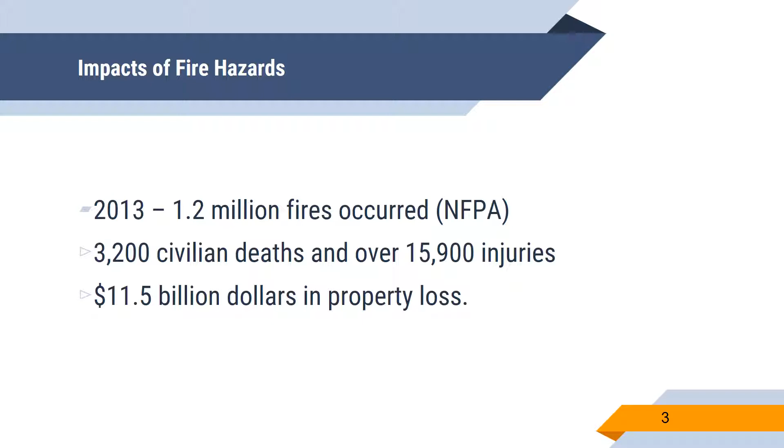Building codes throughout the country regulate the fire resistance of the various elements and assemblies comprising a building structure. These elements include structural frames, which include columns and beams. They also include floor and roof systems and load-bearing walls. Now, all of these elements must be able to withstand the stresses and strains that are imposed by a fully developed fire. At the same time, of course, they must sustain their own dead loads and superimposed loads without collapsing.

Fire resistance ratings required of various elements by the building codes are basically a measure of the endurance needed to safeguard the structural stability of the building during the course of a fire, and also to prevent the spread of the fire to other parts of the building.

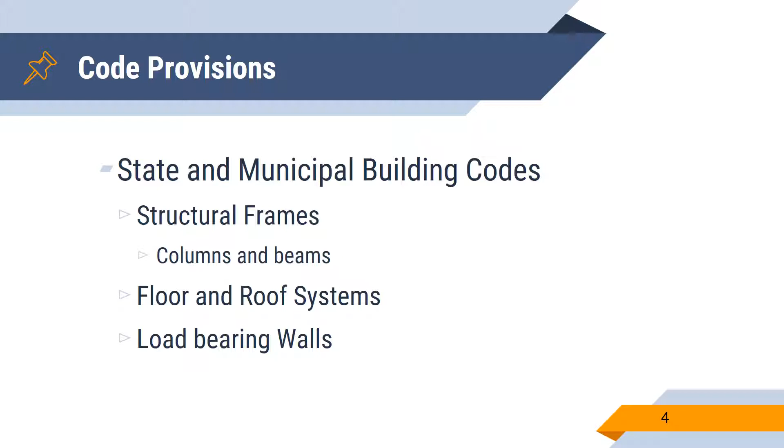Now, in the design of structures, building code provisions for fire resistance are sometimes overlooked, and this may lead to costly mistakes. It's not uncommon, for instance, to find that a concrete slab in a waffle slab floor system may only require a 3 to 4.5 inch thickness to satisfy an ACI 318 strength requirement. However, if the building code specifies a 2-hour fire resistance rating for that particular floor system, the slab thickness may need to be increased to 3.5 to 5 inches.

And this all depends on the type of aggregate used in the concrete. Now, under such circumstances, from an economical standpoint, the fire resistive requirements may indicate another system of construction to be more appropriate. For example, a pan joist or a flat slab plate floor system.

Basically, what it is, certain structural members possessing the fire resistance prescribed in building codes may differ significantly in their dimensional requirements from those predicated in the ACI 318.

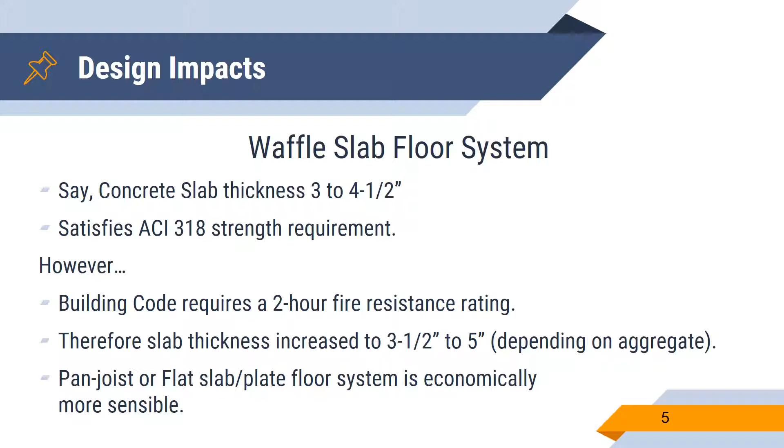Now, most of the state and municipal building codes are modeled primarily after two model building codes, one of which is the International Building Code. The version I'll be referring to will be the 2015, and then the NFPA 5000 Building Construction and Safety Code, which is the 2015 version. For simplicity reasons, I'm going to try to just reference the International Building Code, and you guys can take a look on your own at the NFPA version.

Now let's go over some common terms you're going to hear throughout this presentation.

First one, fire resistance rating. The IBC defines this as a period of time, usually expressed in hours, during which a building element, component, or assembly maintains the ability to confine a fire and also continues to perform a given structural function.

A non-combustible material is a material that, under the conditions anticipated, would not ignite or burn when subjected to fire or heat. Restrained is basically any condition in which the expansion at the supports of a load-carrying member, resulting from the effects of a fire, is restrained by forces external to the member.

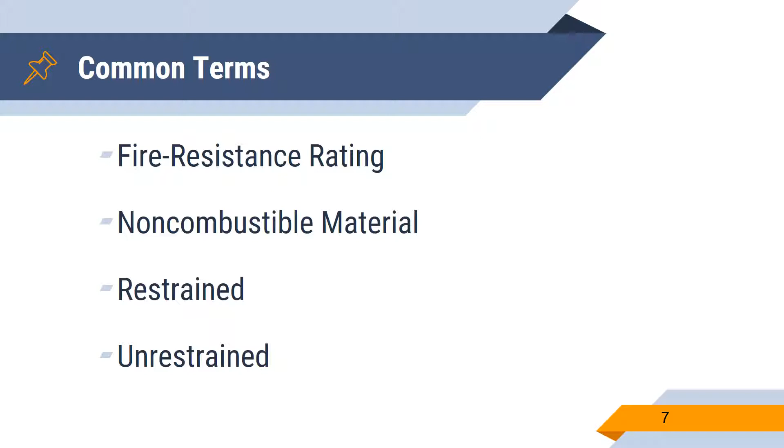Unrestrained is a condition in which the load-carrying member is free to expand and rotate at the supports resulting from the effects of a fire.

In this section, we're going to go over the testing method used to establish a fire resistance rating of an assembly.

Now, the test used to determine the fire rating of certain assemblies is the ASTM E119, which is the standard test method for fire tests of building construction and materials.

In this test, assemblies are subjected to a fire that follows a standard time temperature curve. The fire resistance rating of an assembly is determined by the duration of the test until one of the following set endpoints is reached.

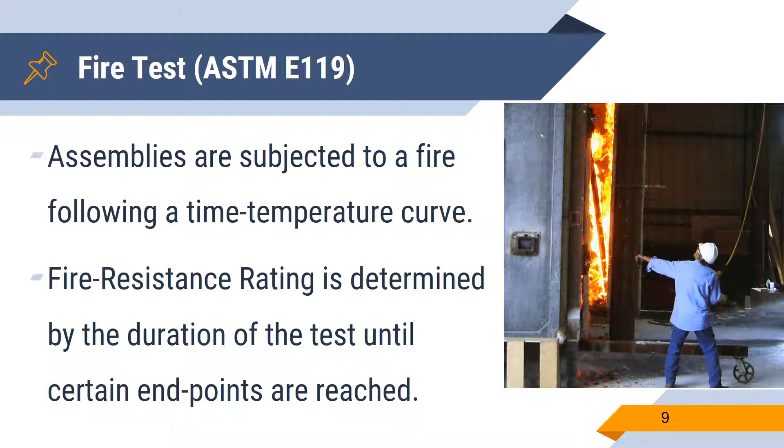For the fire test, there are three endpoints that are looked out for when performing the test.

One of them is flame passage. Basically, they have cotton waste on the opposite side of the assembly from the fire, and as a result of flames or hot gases passing through, the cotton waste ignites, and that triggers the endpoint.

Another endpoint is heat transmission. The temperature of the unexposed surface of the assembly rises to an average of 250 degrees Fahrenheit, or a maximum of 325 degrees Fahrenheit at any one point. So the total average of the whole area is 250 degrees, and then at any point the highest can be 325 degrees.

Another endpoint is structural failure. The test specimen is unable to sustain the applied loading and collapses, which is an obvious endpoint. There are other additional fire resistance rating criteria which you can look up in the ASTM manual.

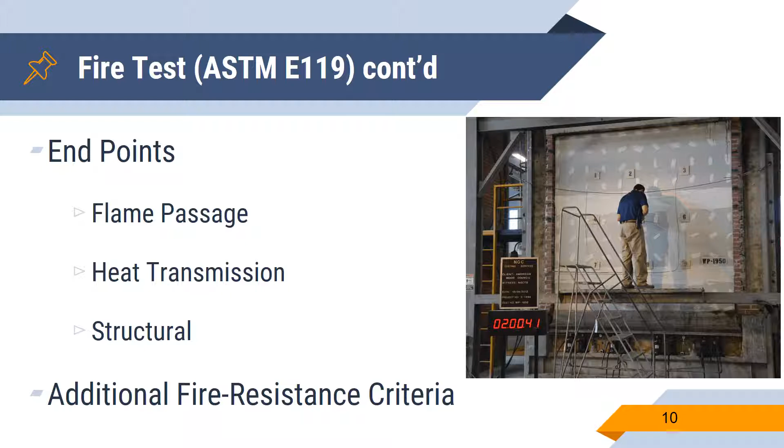Now, the results of many of these ASTM E119 standard fire tests on reinforced concrete members have been compiled and analyzed over many years. Along with the standard fire tests, there has been research and development of data on the strength of reinforcing steel and concrete at elevated temperatures, the temperature distribution within concrete, the verification and modification of theory, and the effects of restraining thermal expansion during heating.

This extensive testing and research forms the basis for analytical methods of determining the fire ratings for reinforced concrete structural members. Determining fire ratings can be classified into two methods: rational design and empirical design. This is what we're going to get into in this next section.

Now, determining fire ratings can be classified into rational design and empirical design. Rational design is accepted in Europe, Australia, New Zealand, and in the United States it's accepted as an alternate. Rational design is a much more detailed design of the fire rating of a system.

The other one is empirical design, that works off of research and development from ASTM testing, and it just establishes minimum critical thicknesses of members, minimum cover for concrete members, and such.

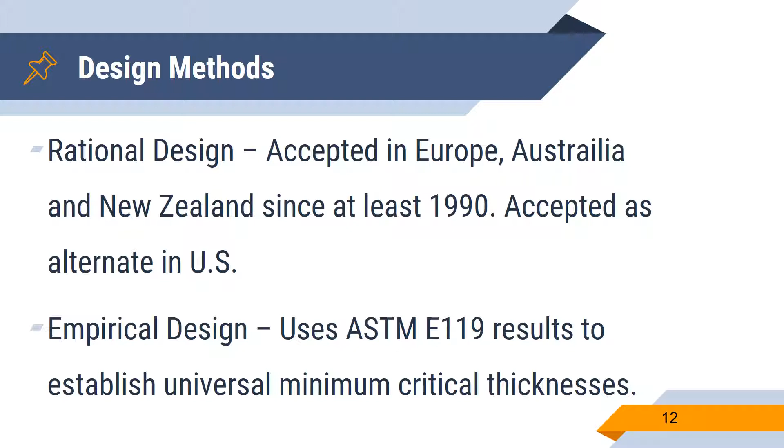In rational design, the fire rating is the time required for the load capacity of a member to be reduced to equal that of the service loads.

The rational design process for fire exposure has been included as an acceptable alternative to prescriptive methods in applicable codes in Europe and Australia, as mentioned previously. In the US, building codes have been slow to adopt similar provisions. However, designers are permitted to present the results of a rational analysis for fire resistance rating as an alternate method of compliance.

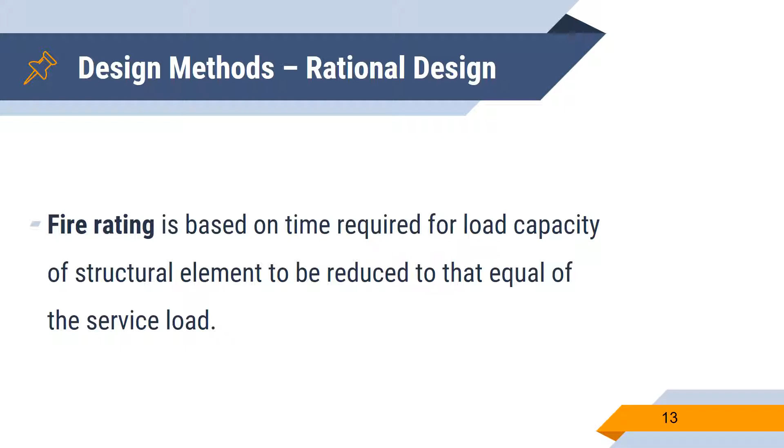The rational design method is a three-step design, the first of which is defining the exposure of the fire incident on the assembly. This can be from the ASTM E119 standard time and temperature curve, or another source, as long as it's agreed upon with the building official wherever it's codified.

The second step is the heat transfer, calculating the heat transfer on the assembly. This may be determined using simplified methods such as tables or lumped thermal capacity models, or more advanced methods employing finite element programs in both 2- or 3-dimensional forms to establish the temperature profile within the assembly.

The third step is the structural analysis, which uses established degraded material properties at elevated temperature. Basically, the structural analysis treats the fire as an imposed load and follows the same procedures that would be used under normal conditions, substituting modified values for concrete compressive strength, yield strength of reinforcing steel, and modulus of elasticity for both materials at elevated temperatures.

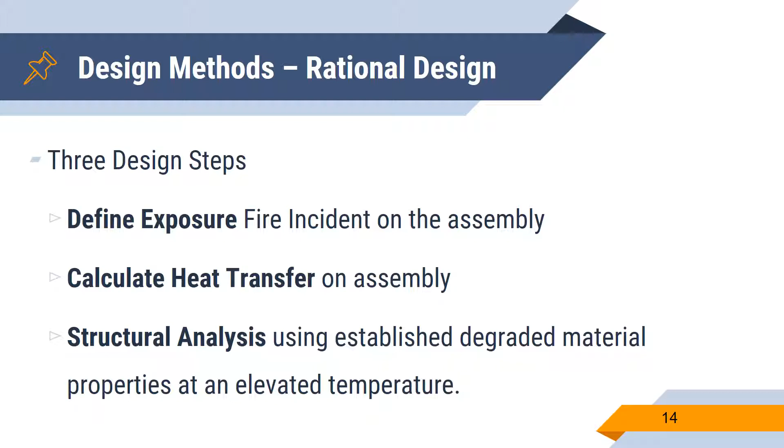Now let's go over empirical design. Empirical design uses the results of ASTM fire tests, such as data on the strength of heated reinforcing steel and concrete, and the temperature distribution in concrete. All this is used to establish critical member thickness, concrete cover, and so on.

The application of empirical design is very simple, simpler than rational design, since structural analysis is not required. For cast-in-place reinforced concrete, the term empirical design isn't even accurate. A more accurate term would be an empirical approach, since there really is no design involved. Conforming to the requirements merely involves providing the required concrete cover for reinforcement and determining required thicknesses for a member, and so on.

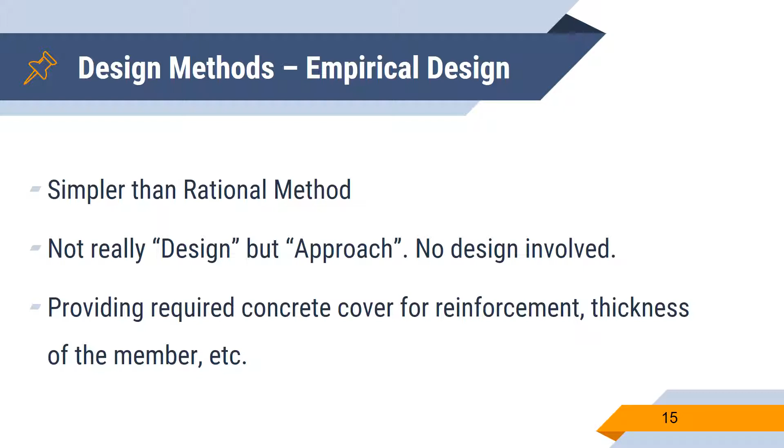Now let's go over some design considerations for different building elements, first of which is wall assemblies.

The fire ratings of reinforced concrete walls are nearly always governed by the heat transmission endpoint before the other two endpoints, one of which being allowing passage of flame or failing structurally.

The table below lists the minimum reinforced concrete wall thicknesses for different types of aggregates to provide the required fire ratings. In the next slide, you can take a look at what each of these aggregates are. As you can see, for a 2-hour rating, sand lightweight and lightweight aggregate types can give you a 2-hour rating at a lower minimum thickness than the other two.

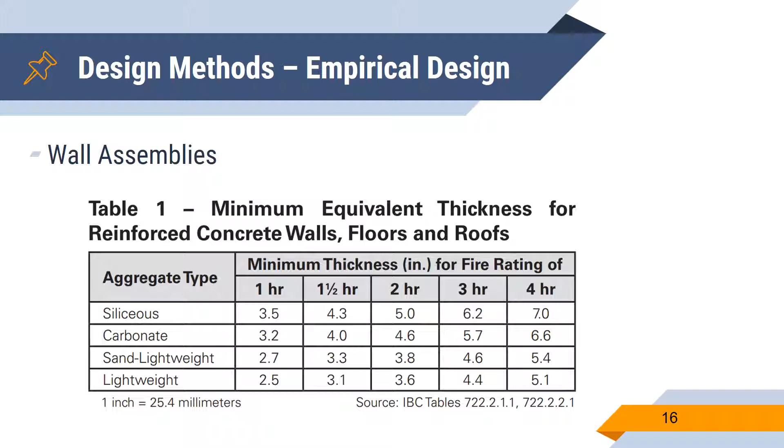You can go to the next slide and take a look at what each aggregate type consists of. These are the structural concrete aggregates that you'll see again in the slide. You can read through all the definitions; I'm just going to quickly go through it.

Siliceous aggregate consists of silica. Carbonate is basically like limestone or dolomite. Sand lightweight is natural sand and weighs between 105 and 120 PCF. Lightweight weighs even less, 85 to 115 PCF.

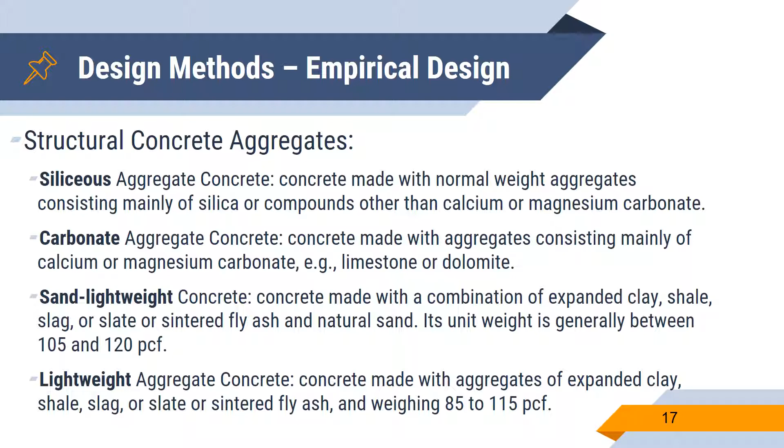Another structural element is floors and roofs. Similar to walls, the fire ratings of reinforced concrete floors and roofs are often governed by the heat transmission endpoint as well. Therefore, Table 1 is also applicable for reinforced concrete floors and roofs to determine minimum thickness.

Table 2 listed here lists the required concrete cover based on the type of aggregate and restraint condition to provide the required fire rating. If you go back in the presentation, we've discussed restrained and unrestrained conditions.

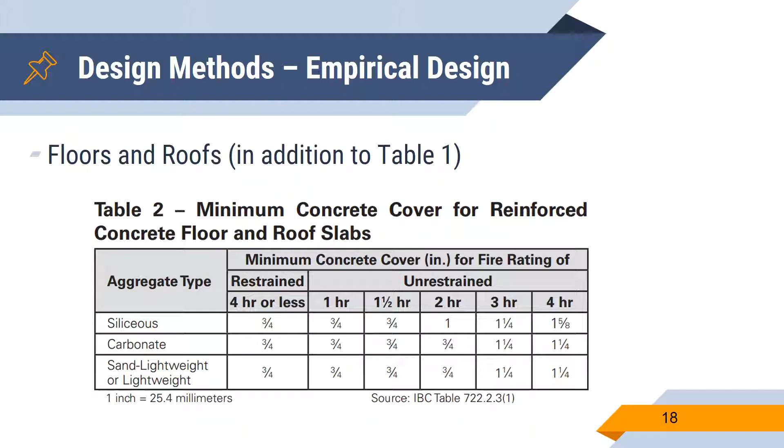Here's an example of different types of scenarios where they would be classified as restrained or unrestrained. If you go down to the bottom, it says concrete framing - most of it is restrained. If you go up to wall bearing, there's some unrestrained and some restrained. You can go through this, read, and get a better understanding of what we're talking about when we say restrained or unrestrained.

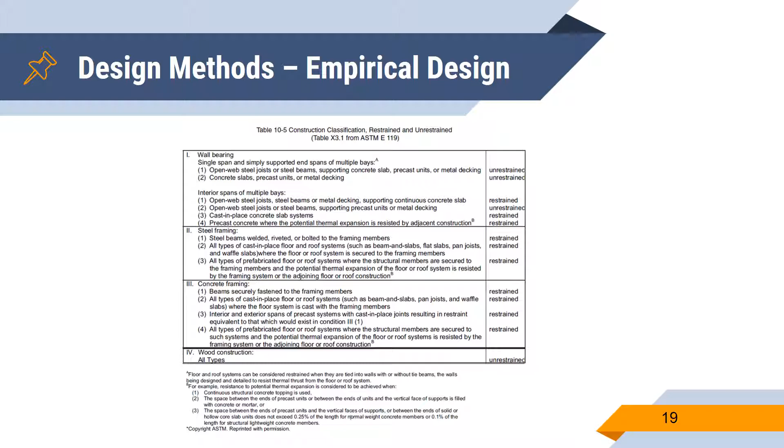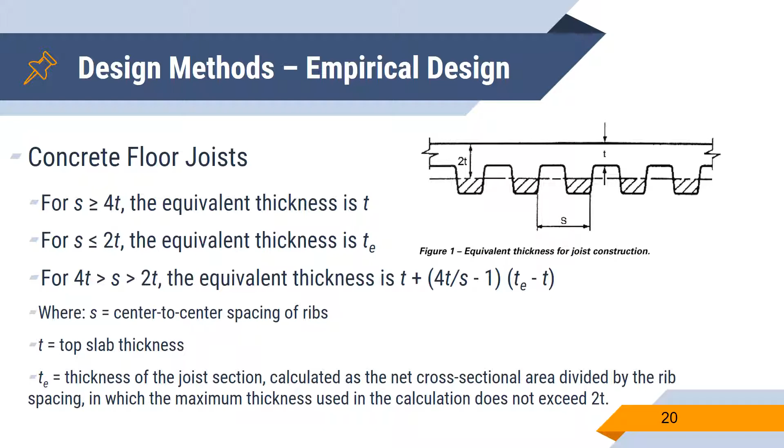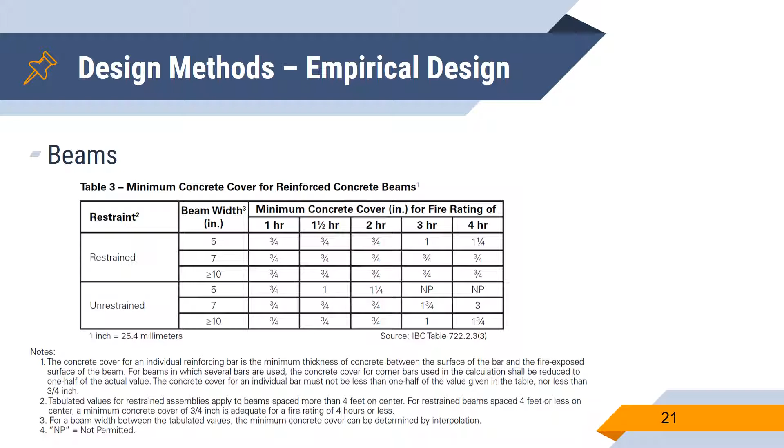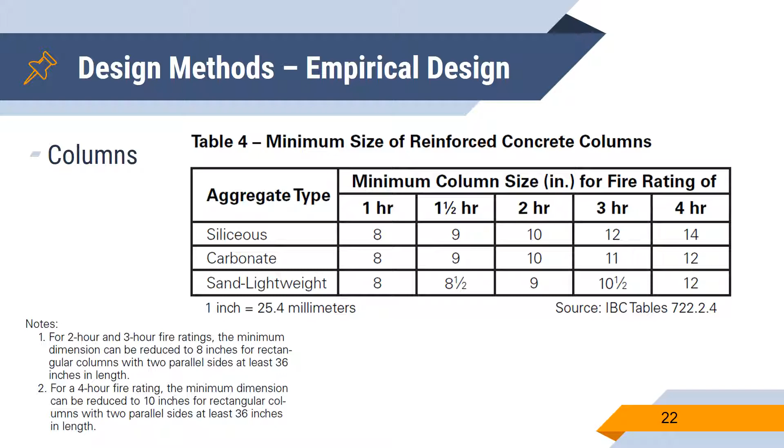That pretty much wraps up our design considerations for reinforced concrete. Some benefits: since reinforced concrete is composed of inherently fire-resistant, non-combustible material, there's no need for additional costly fireproofing.

Cast-in-place reinforced concrete construction provides buildings with excellent fire endurance. In an actual fire, reinforced concrete floors and walls are likely to remain in place longer than the time reflected by the ASTM designation, since their fire resistance rating is determined by heat transmission and not structural failure.

In most cases, just how long the walls and floors will continue to perform is unknown because the fire tests are often ended prior to structural failure. Thank you for listening, and hope you enjoyed it.